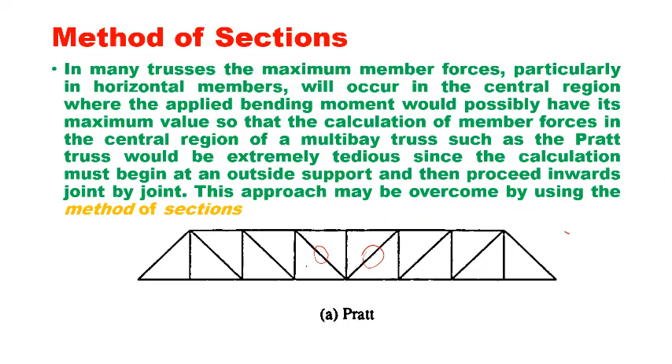So this method is based on the premise that if a structure is in equilibrium, any portion or component of the structure will also be in equilibrium under the action of any external forces and the internal forces acting between the portion or the component and the remainder of the structure.

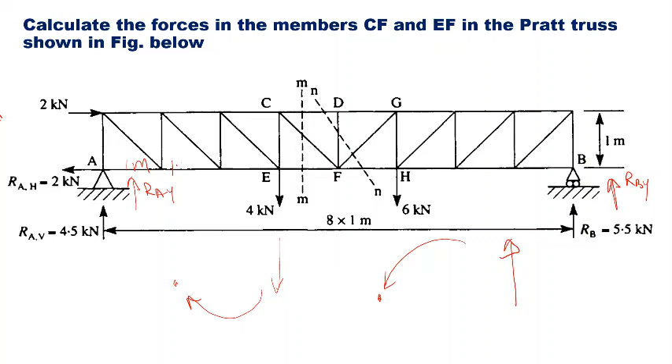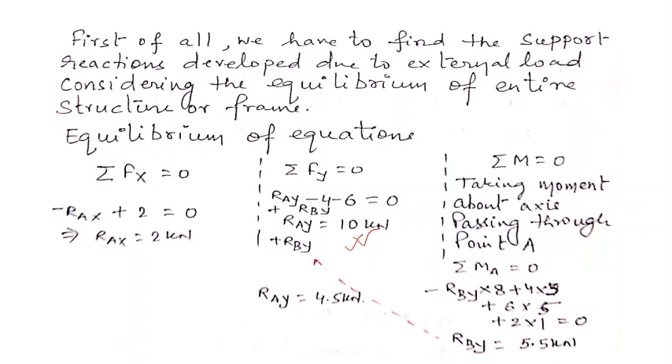And 4 into 3, this is 1 meter and 1 meter, 4 into 3 plus 6 into 5 plus 2 into 1; you will add it, and after solving you will get RBY equal to 5.5. Putting RBY in this equation, you will get RAY equal to 4.5. So we have calculated the support reactions, that is RAX is 2 kilonewton, RAY is 4.5, and RBY is 5.5.

Once the support reactions have been calculated, assuming the truss section MM and bifurcating the truss into two parts, this is the left half part of the truss. So you can see that this is FCD, the force in the member CD, this is FCF, force in the member CF, and FEF, force in the member EF.

So we have only three unknowns here, that is FCD, FCF, and FEF. Now we will consider the equilibrium of this whole part, assuming a section mm as shown in the figure, bifurcating the structure into two parts and considering the equilibrium of the left part. So this is the main principle behind the method of section, that since the structure is in equilibrium, each and every part of the structure will also be in equilibrium under the action of external load or

internal forces. So we have three equations of equilibrium, sigma Fx = 0, sigma Fy = 0, and sigma M = 0. We will use these one by one, and after solving we will be able to find the three unknowns, because three equations, three unknowns, it can be solved easily. So let us use the equation first, sigma Fx = 0. So 2, that is the external load here, 2 kilonewton, it is in positive x direction. FCD, it is also in positive x direction, so you will get FCD.

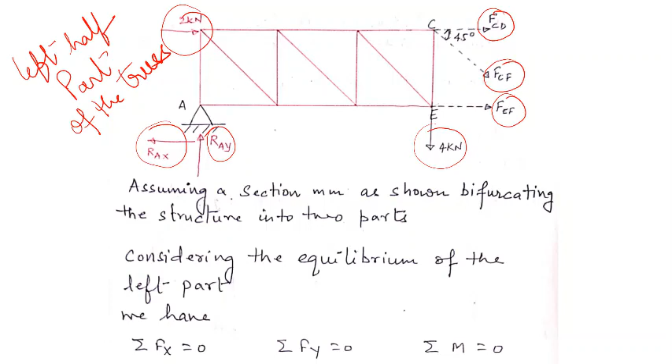Sigma Fy equal to 0, so you will get 4.5. 4.5 is the support reaction, that is RAY, it is in upward direction. Minus 4 is in downward direction, so you will get here minus 4. And this FCF, which is making an angle 45 degrees in downward direction, you will get its component along negative y-axis as minus FCF sin 45. So after solving this, you will get FCF equal to 0.71 kilonewton. 0.71 is coming out positive, so the direction will be the same as what we have assumed.

Initially all the directions are taken in a positive direction, that is tensile. If it comes negative after solving, then we will take it as compressive in nature. Now taking the moment M equal to 0, the moment of all the forces about the axis passing through point C, though you can take the moment about any point, because the moment equilibrium will be the same about any point, but in this case we have taken the moment about point C.

So if we want to take the moment about point C of all the forces, then for 2 kilonewton, its moment will be 0, because its line of action will pass through point C. 4 kilonewton will also give 0 moment about point C. After that, FCF and FCD both are passing through point C, so their moment will also be equal to 0. So we have only three forces: one is RAX, another one is RAY, and another one is FEF, which will cause moment about the axis passing through point C.

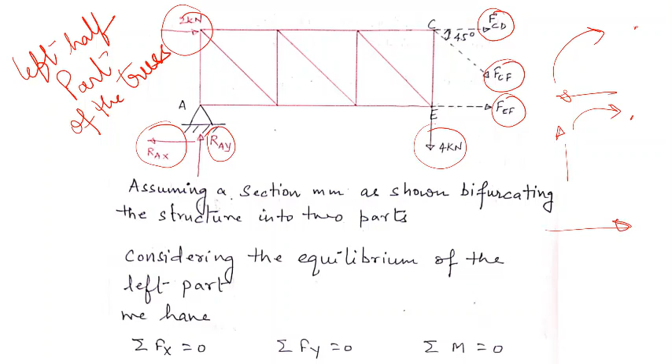So that is RAY into 3 plus RAX into 1 minus FEF into 1. RAX is in this direction, your point is here, so it will cause a clockwise moment, and clockwise is taken as positive in this equation. Similarly, RAY is in upward direction, your point is here, so it will cause a clockwise moment. And FEF is in this direction, point is here, so it will cause an anti-clockwise moment.

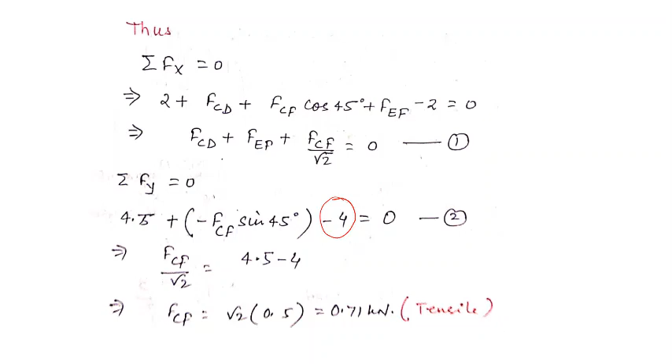So you can see here that each governing equation is followed by some sign convention. You have to follow sign convention, otherwise it will lead to erroneous results. So RAY into 3 plus RAX into 1 minus FEF equal to 0. Then after solving, you will get FEF equal to 15.5 kilonewton, and it is coming out to be tensile in nature. Putting the value of FEF back into equation number 1, you will get FCD plus FCF divided by root 2 equal to 0. Since we have calculated FCF, we will put it in equation number 1, and you will get FCD. So FCD is coming out to be minus 16.0 kilonewton.

So hope students you have understood the method of section. It's very easy, you just need to practice it and try to solve by your own, so that you will be able to clear your doubts, and the more practice you do, the more problems you will be able to solve.